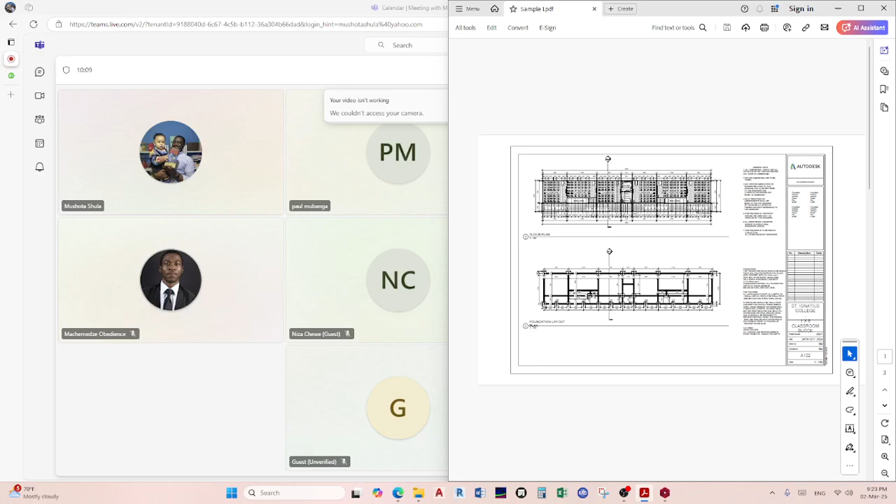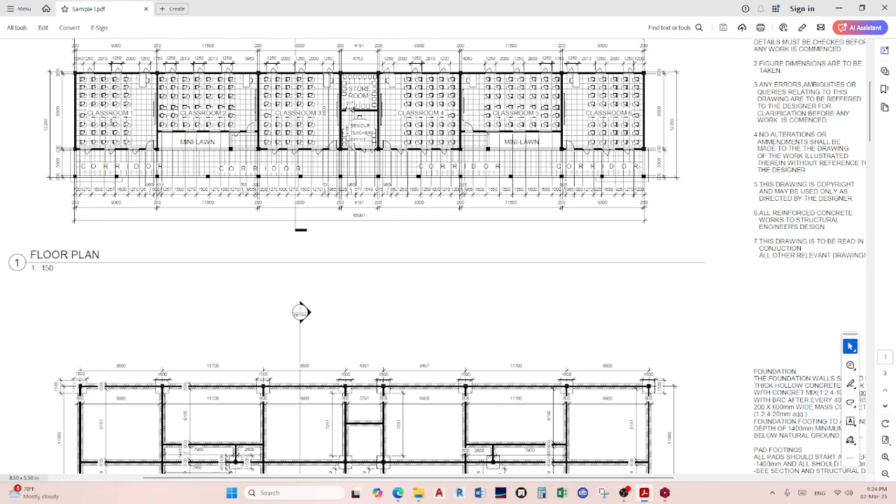So on one part, I have the PDF from yesterday. For everyone else that wasn't able to view the video from yesterday, what we are going to be doing is we will analyze this structure. This is a problematic structure. Initially, the architect had designed it so that it can be a one-story structure. But now the client would like to revise it so that there's another floor right on top of the ground floor, so that they can have more classrooms. It's a classroom block with six classrooms.

And then this is the architect's proposed foundation layout. So now the situation is that the client has already started construction, right? And they've already done these foundation bases of 1.5 by 1.5 and columns of 400 by 400. So now their concern is, can they add another floor on top with what they've already constructed, these 1.5 bases and 400 columns. And also another thing is that now they do not want to use concrete.

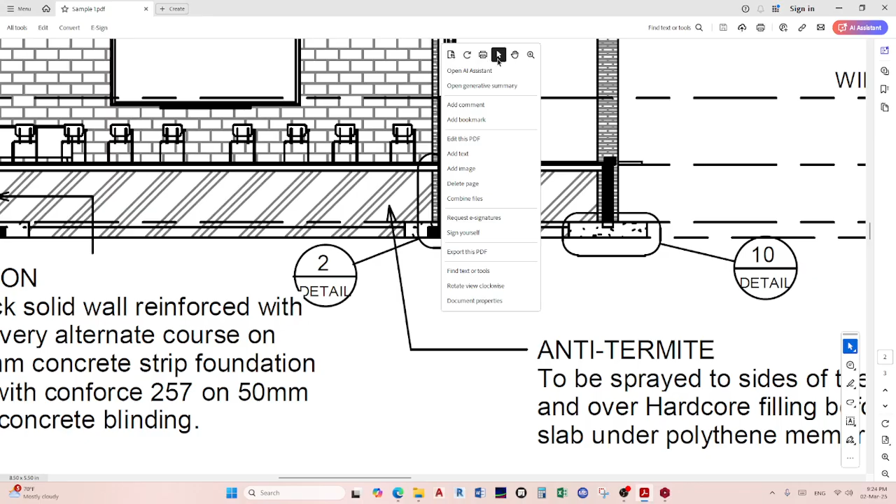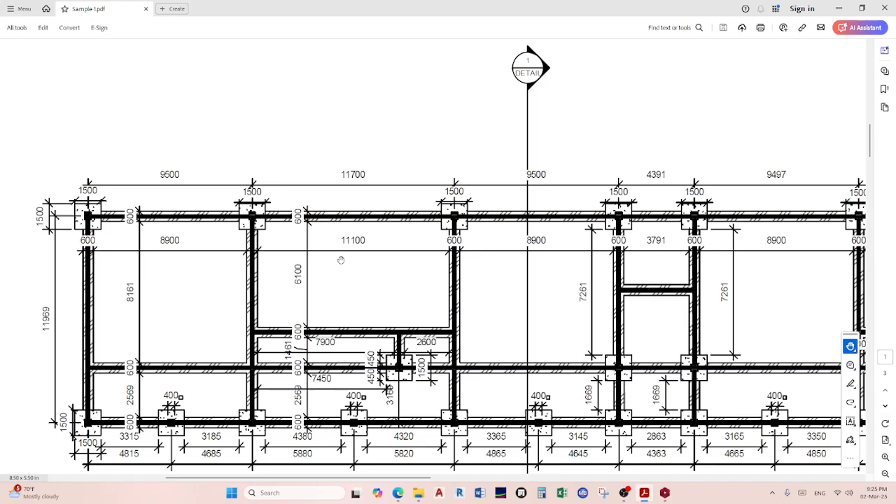When you zoom in on the section here, you can see that initially the proposed material is concrete. So now they would like to switch to steel, because after some advice, imagine having a beam that's running for 11.7 meters. So we want to switch to steel, because steel is fabricated and sold in 12-meter lengths.

So from yesterday, what we did is we did some grid lines and we placed some columns. Some people call them neck columns, other people call them stub columns, because they're called neck because they're buried in the earth, so that's the neck. I do not know what stub means, but I know they're called stubs. If anyone knows why they are called stub columns, you may be able to explain to us why.

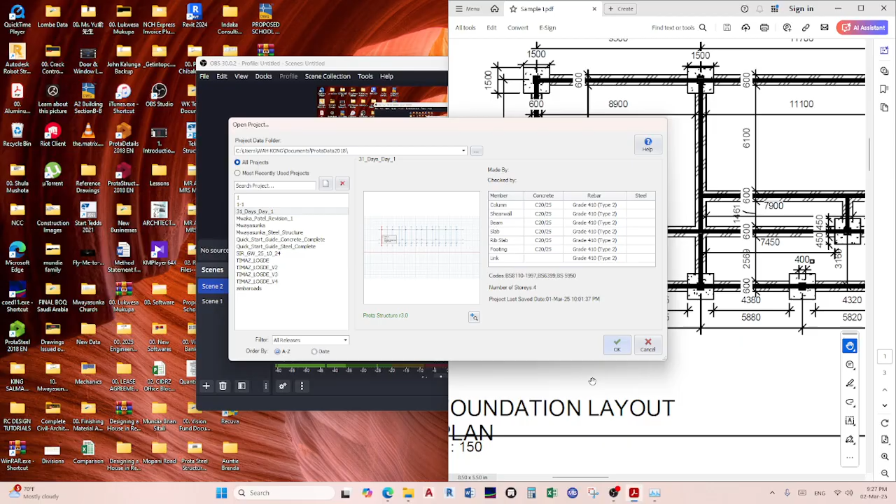So this is what we have done yesterday. And yesterday we had a good audience. We had Lisa, we had Obedience, we had Mukusa, although I cannot see Mukusa here today.

But then, Niza, if you remember the recap that we had yesterday, can you just walk us through if possible? And also, I hope you can see my screen. I can't really hear that. Everyone is complaining about the buzz sound.

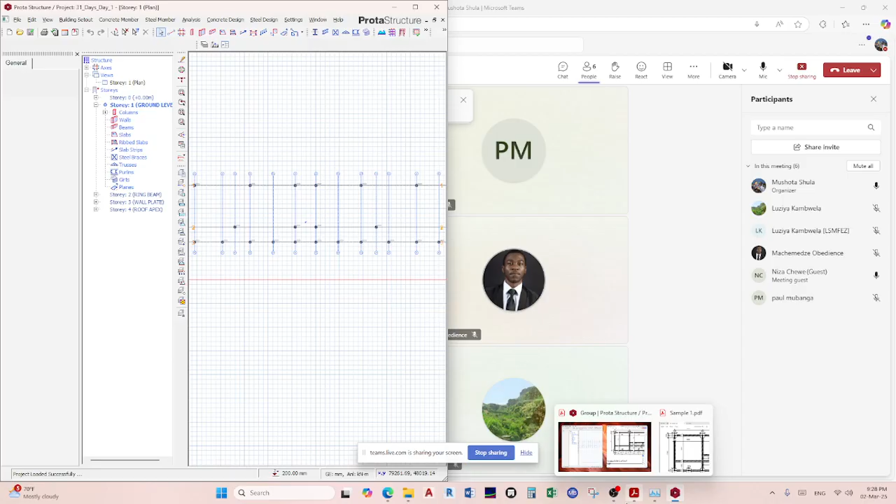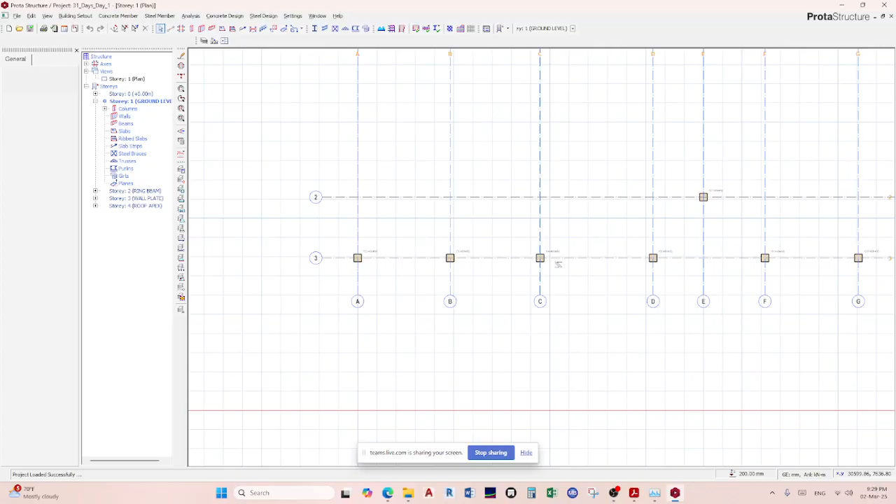So from yesterday, we had added grid lines in the Y direction and the X direction. This is according to the Cartesian coordinates. We've got A up until G here, and 1 to 3. This makes it very easy for us to identify these columns. We would say this column is A1, this one is A3, this one is B3, this one is C1, and this one is C3, and so on and so forth. So we also discussed the building layout, this one edit story.

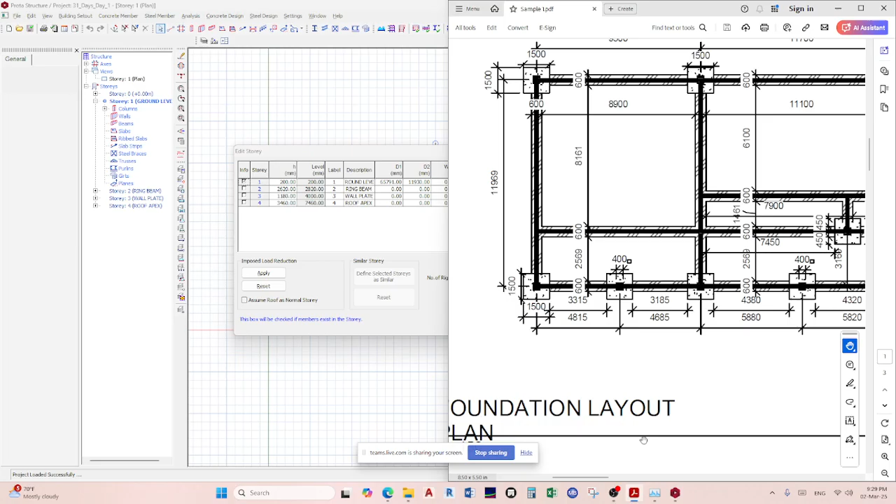We had shown that we can add the levels according to the architect's section, from the top of the pad, the floor plan, the ring beam, and the roof. One thing about this edit storey feature is it shows you which floors or levels are populated, according to the tick box here, the info.

So when you are designing in Prota Structure, what usually happens is that if you add a level or a floor, you need to add information in it, you need to populate it. That's when you can run the analysis. If you create a level and do not populate it, there will be no analysis. Let me show you.

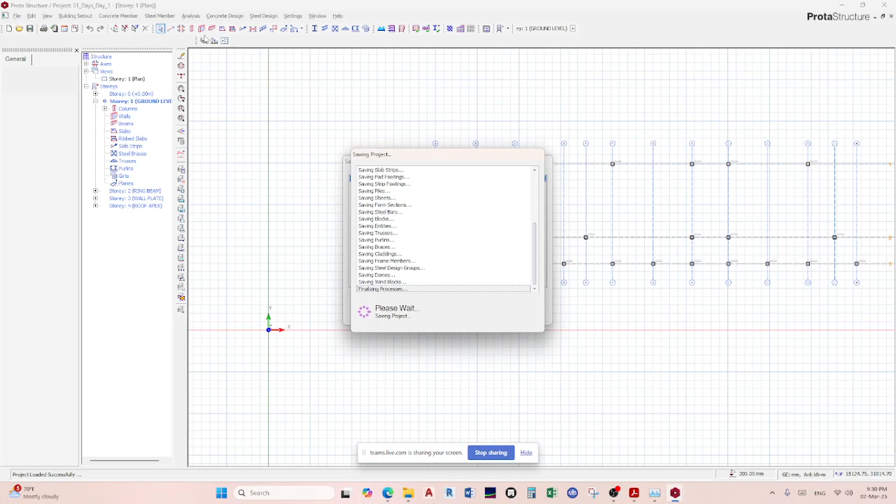If I go to this analysis tab right now, and go to building analysis, suppose I decided to run this analysis, it will give me an error message saying certain information in other floors has not been included or populated. So the edit storey button feature is extremely useful.

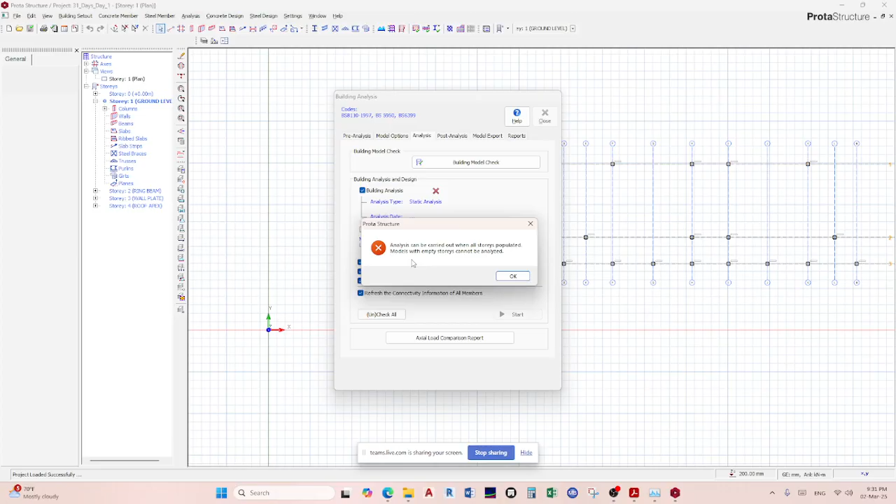If I perform a building check here and start, no errors. But suppose I decided to run an analysis here, you see this error message, it says analysis can be carried out when all storeys are populated. Models with empty storeys cannot be analyzed.

So in the Building Setout, when you go to edit storey, this tick box shows that the ground floor has information, and this information is when you go to the 3D. In this section of the software you can change to plan views or 3D views. You go to storey, right click, and you've got these options, either plan or 3D. If you'd like to view it in 3D, it gives you this 3D view.

Are you guys following?

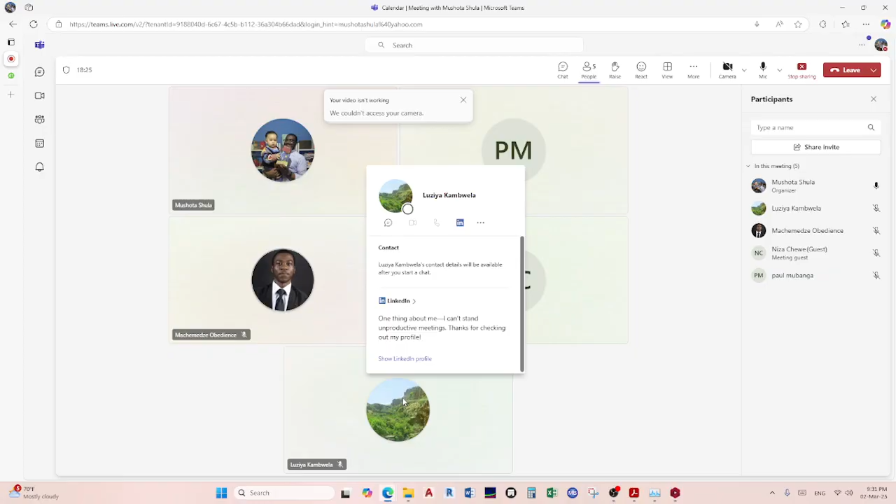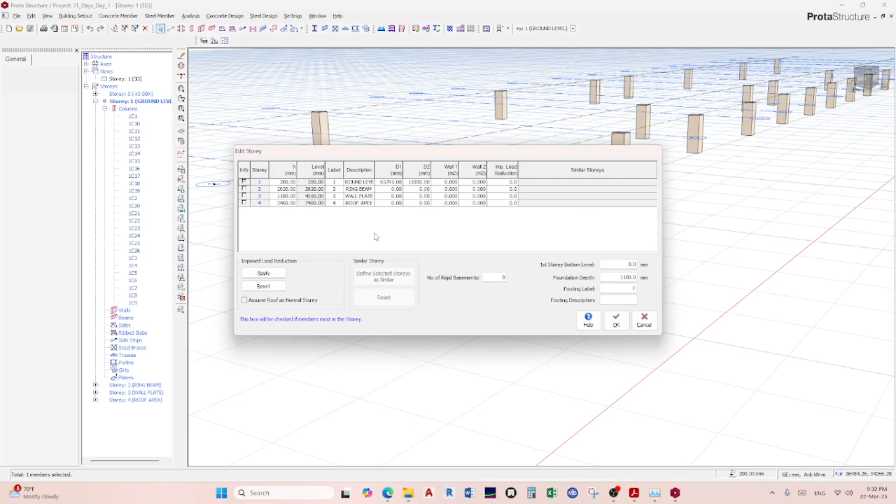Okay, so here I've got these neck columns or stub columns, and we discussed that when you go into the building set out and click on edit storey, it shows you the foundation depth. And then we carried out that experiment just to see what it means.

For example, if I wanted my foundation depth to be 5 meters, I click enter and okay. See how they go deep into the ground by 5 meters, because the ground floor remains here, but when I go to the first floor, that's the top, the difference is 200 millimeters.

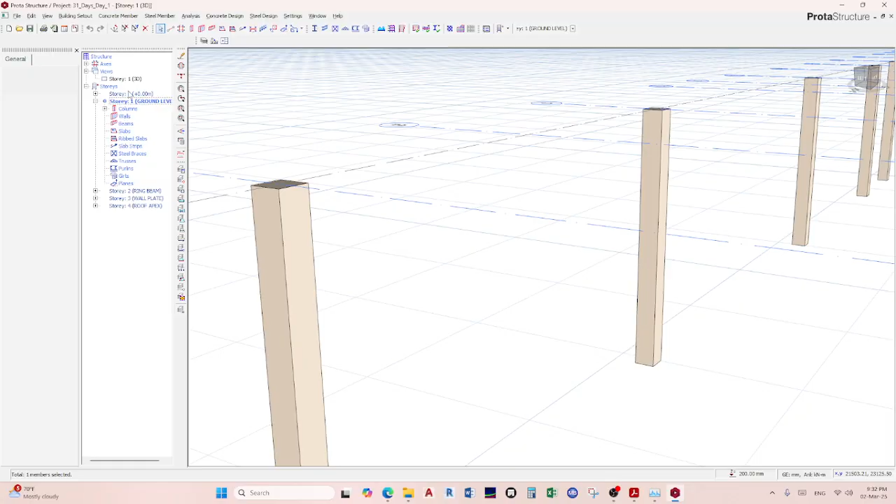Okay, let me put it back because we're only carrying out a design analysis here. I would like for my foundations to balance an economical standpoint and also a structural standpoint. You do not want to use a lot of concrete. The deeper you go, the more material you use.

Also, if you do not go so deep, then you're building the structure on the surface, and you do not want to do that. You want to make sure that the foundational substructure elements are in the ground, so that the load transmission and the load transfer can be good.

So here it was at 1100, but I would like for it to be maybe 1300, so that when we add the thickness of 300, it goes to 1600. I'll okay it here.

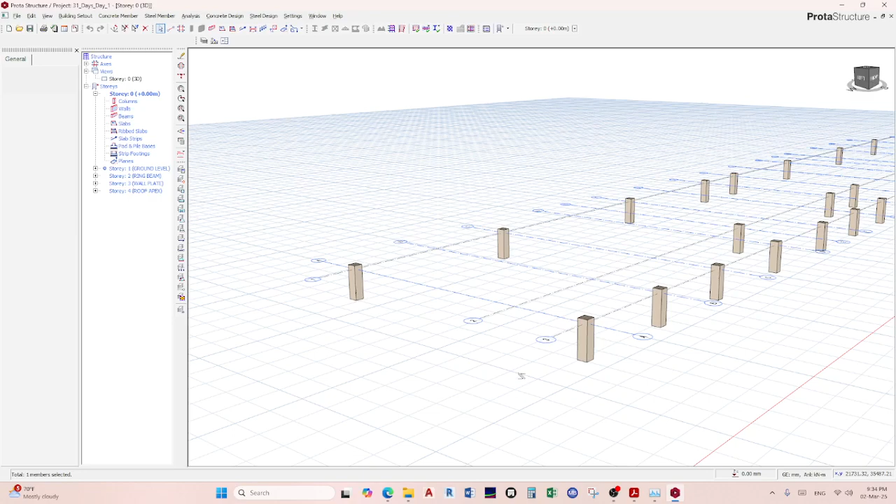See, it's reduced here. Now I can begin my column placement. I want my columns to start from the ring beam, from the wall plate. What is the level of the wall plate? Here's the wall plate, it's at 4 meters.

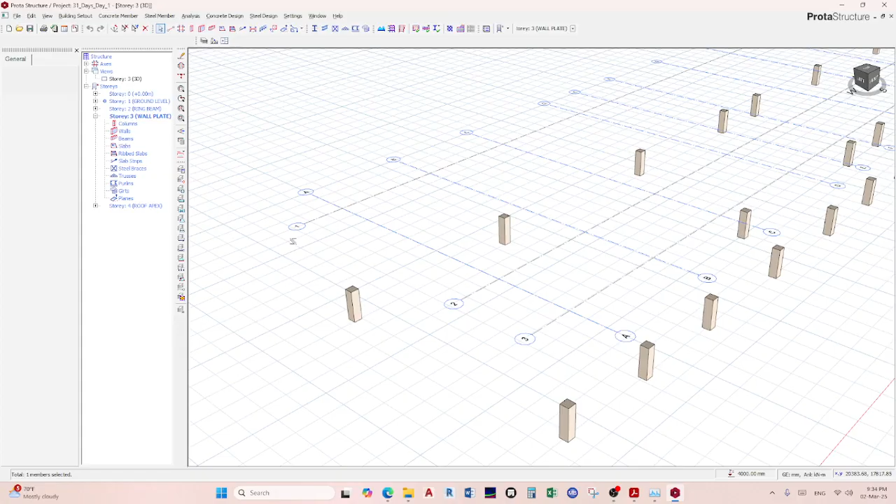So if I would like my column to start from here up until there, I'll go to this column button, or concrete column. Actually I'm using a steel column, so either the steel tab here or this one. When you go to this one, these are the properties.

When you click on the section, it says section. Once you hover your mouse over it, it says section manage. If you click on it, you can decide whether you want it to be concrete or steel. Like I explained, our particular client wants the superstructure in steel. Then you can decide if you want to use the British, the Euro, or the American sections. In Zambia we often use the British or the Euro.

This UC means universal column, the UB will be universal beam. If you read a lot of structural drawings, you see it's either UC, UB, or the IPEs. The IPs are usually in the Euro. You see, this is the IPs here.

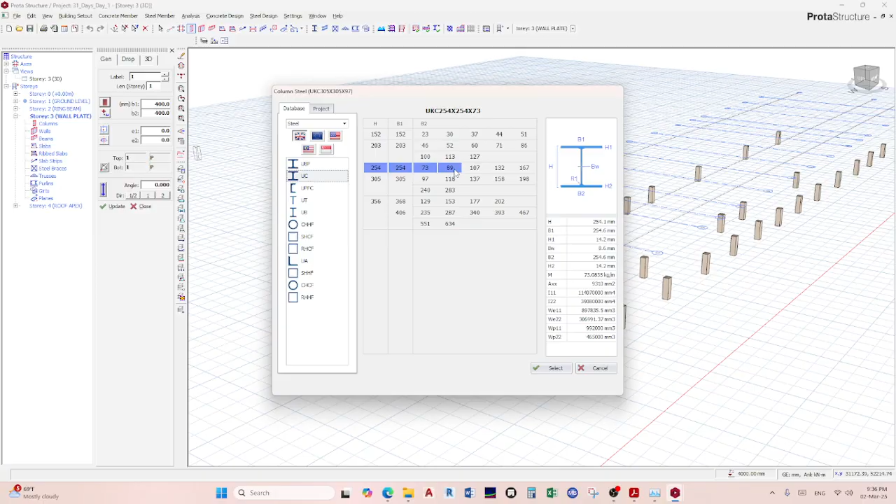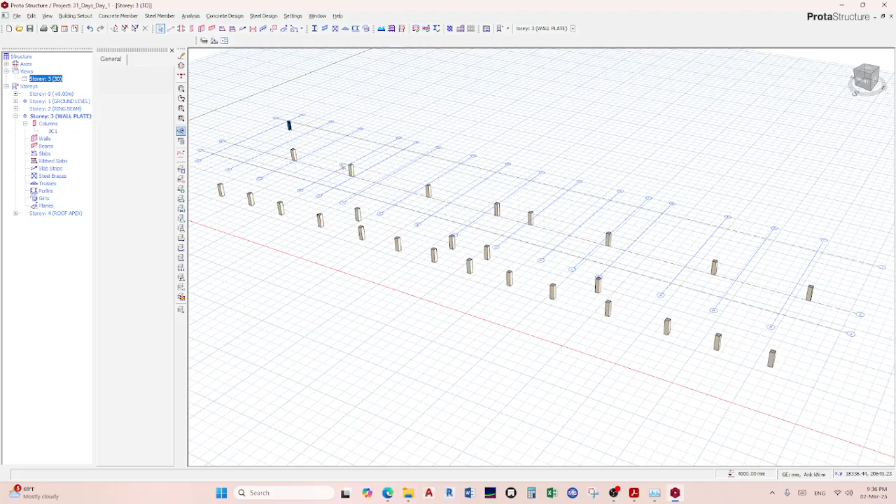So I'd like to use a universal column, section 254 by 254, and the kg is probably 167. I select, I okay. I would like to place these in plan view. When I click on the insertion, press cancel, and go to 3D, I'll be able to see the column over here.

This column is starting from the left, but I'd like to extend it to the ground floor. I'll select it, right click, go to properties. Here in 3D, there's the delta Z for the top and the delta Z for the bottom. What it means is that there's an increment. If I add 100 increment for the top, it goes to the top.

Watch - if that wasn't visible, let me say 5,000. 5,000, update. See how it goes to the top.

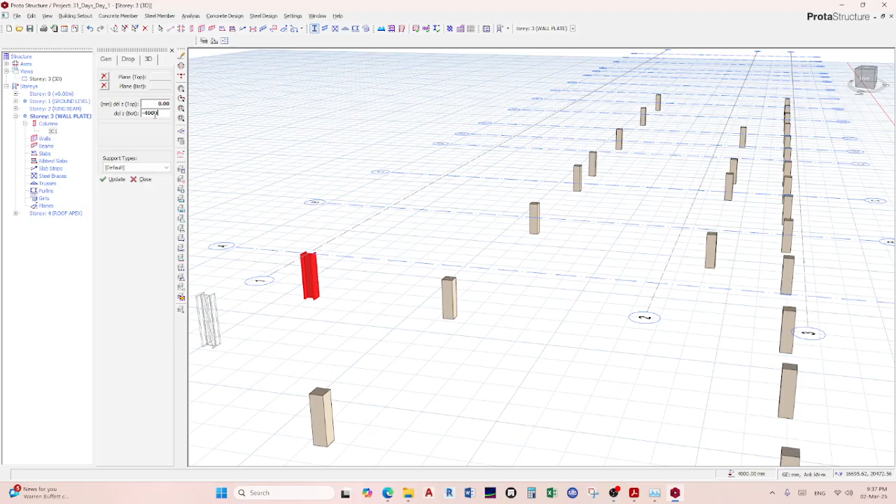But ideally I want it to maintain the wall plate level, and I want it to go down here. So what I'll do is set this to 0, update, and then this will be minus 4,000, because I want it to go minus 4,000, and I'll update. See how it sits on the column there.

Can you guys hear me? I can hear you, but I've lost the screen. Not clear now what you're saying. Okay, can you see the screen now? Can you guys see the screen now? Okay, moving on - not yet.

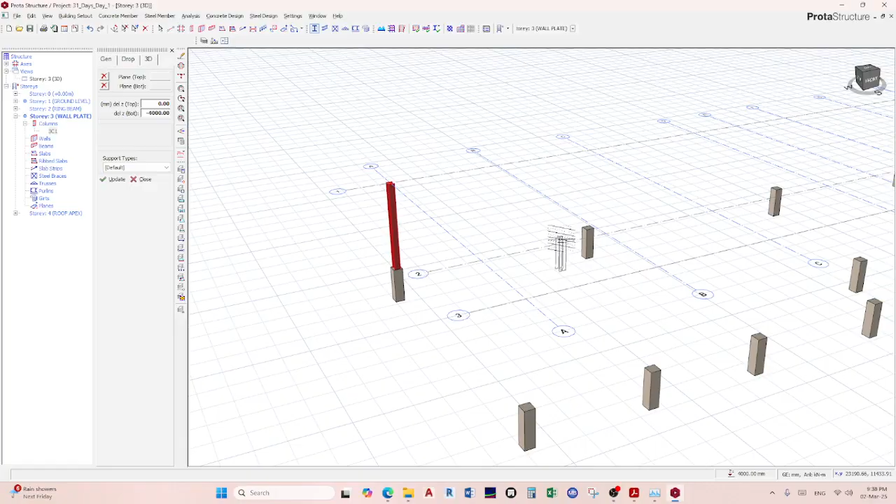So here, what I've done is I've placed the steel column on top of the concrete column, and then here at the bottom we're going to have a base.

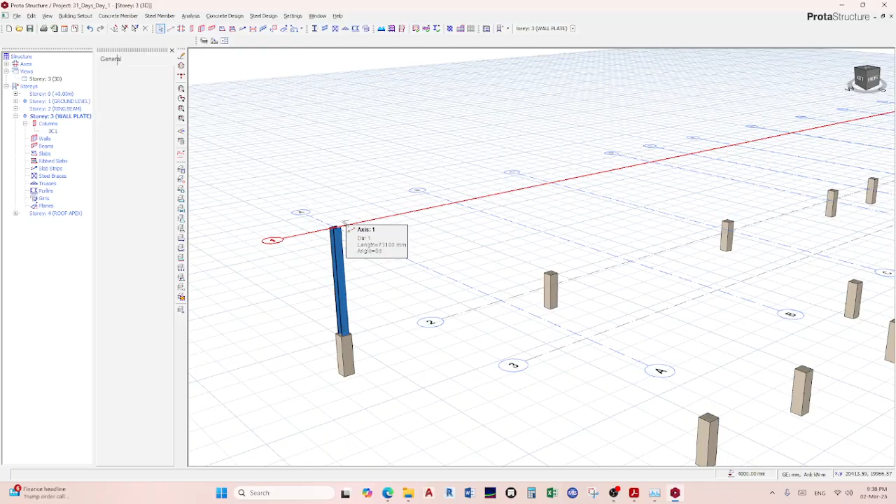There's this cool thing you can do where you can have a 3D view in one window and a plan view in another. In order to do that you need to create two views. So here on Views, you right click - since you already have a 3D view, say you need a plan view.

Now you've got two views; previously you had one. For example...

If I close this, previously I had one - you see it says storey 3. But then if I click on Views, right click, I can add a plan view. Now I have two, so you can place them side by side.

What you can do is go to the Window tab, click on it, and choose whether you want them in a vertical manner like this - and then from there you can switch this to 3D, or you can have them in a horizontal layout.

If you'd like to have one at the top and the other at the bottom, this is actually cool, and it helps so that you can know exactly where you're placing it.

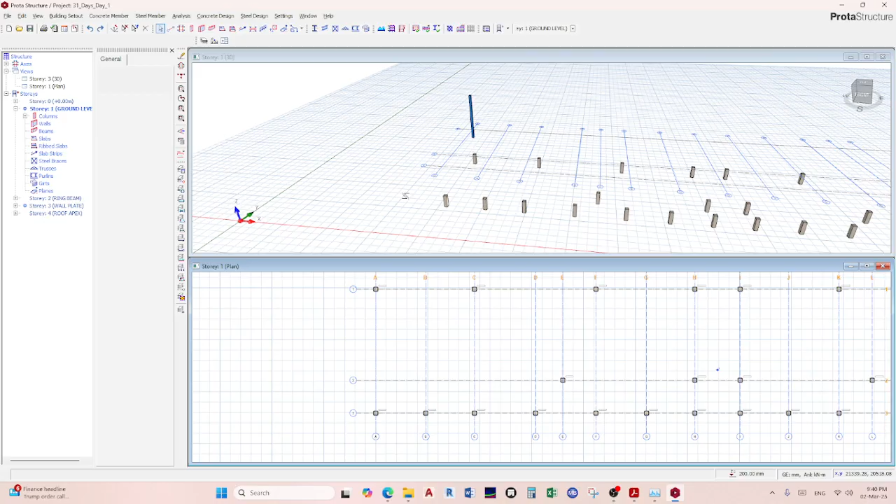For example, when you click it, you activate it. When I click this and go to my ground level where the columns are, I know exactly where to place my steel columns.

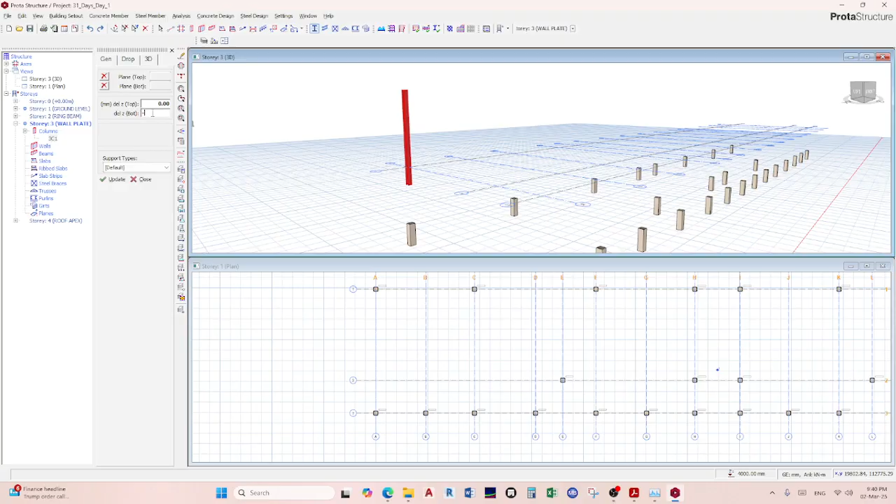Let me just adjust this because I did control Z - properties 3D maintains that 5,000 after pressing control Z, and I would like it to go 4,000 down, and I'll update.

So I want all the columns to sit like that. If I go here, I'll place another one also.

When you hover your mouse over it, you see 4,000 goes all the way to the bottom, but I want it to sit flush with the concrete column.

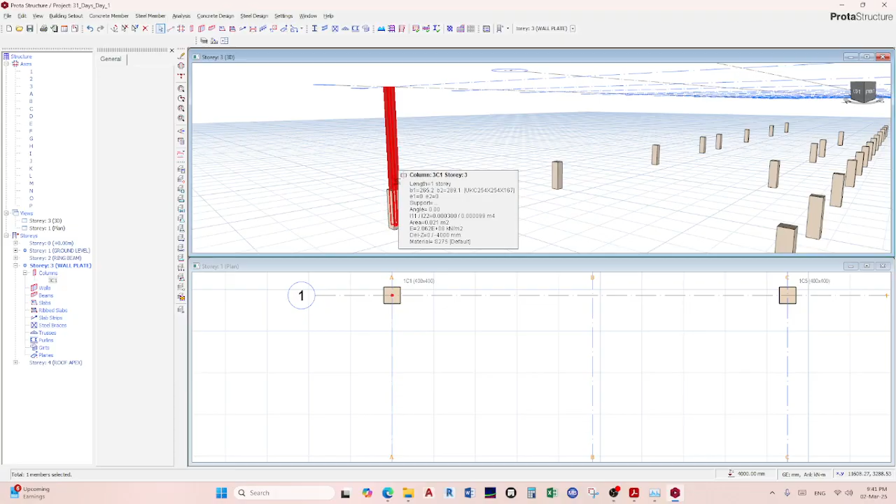So what I'll do is go to the building setup, and I need to find the difference between the wall plates here and down here. You see?

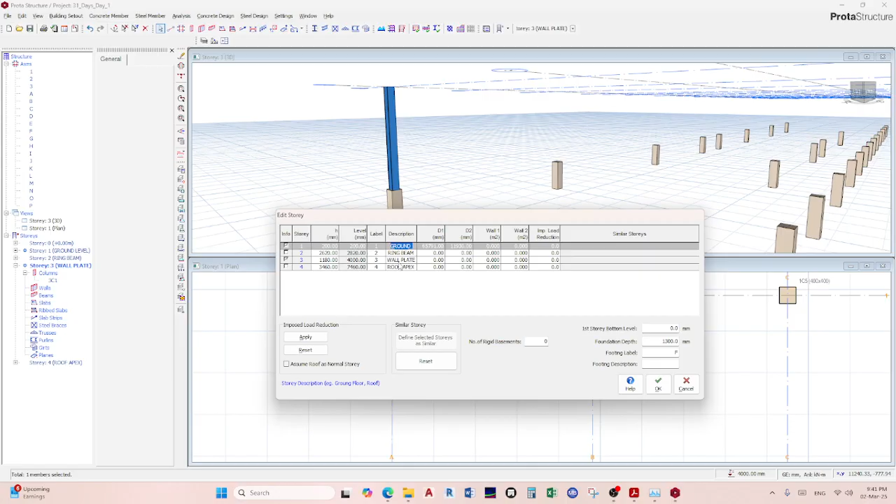So what I'll do is go to your calculator, go to your building setup, and find the difference. So let's say 2,000 minus...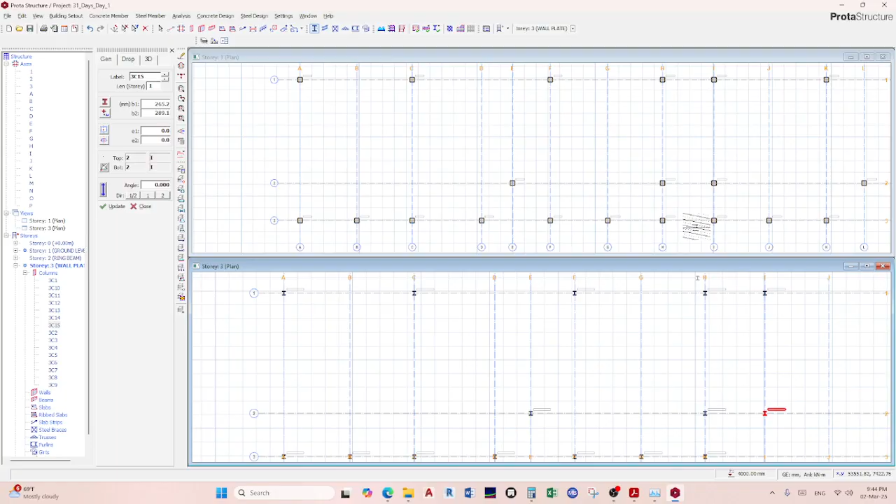I1, H2, I2, and I3. Also J3, K3, L2, K1 here - placing columns at each of these grid intersections.

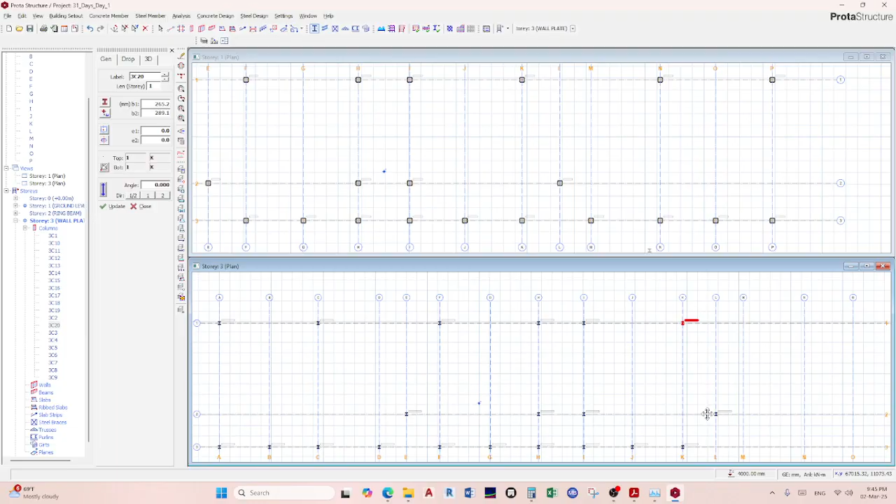Still have a lot of columns to place. Here in properties, N1 here, N3, N1, O3, then P3 and P1.

So here you click on that, you can change it to 3D, and you can see that we have steel columns on top of the concrete columns.

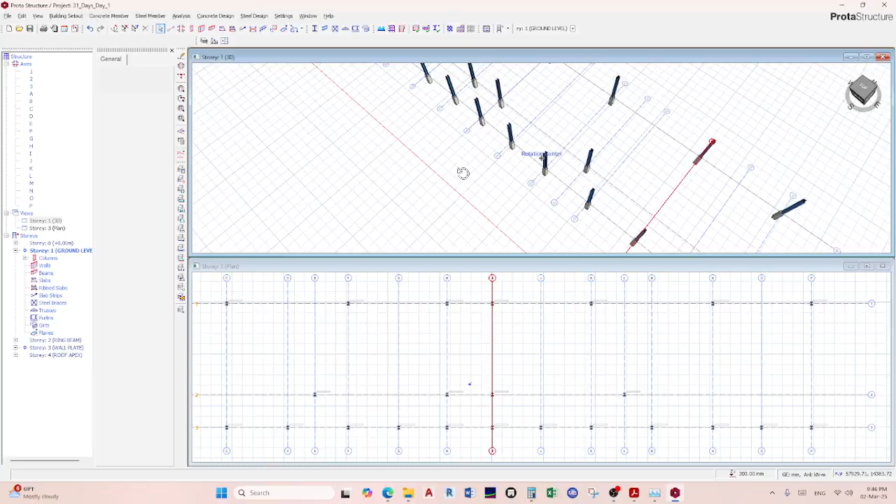So this is just one part. Control S to save your project, and then to end the video I'll show you how to place trusses.

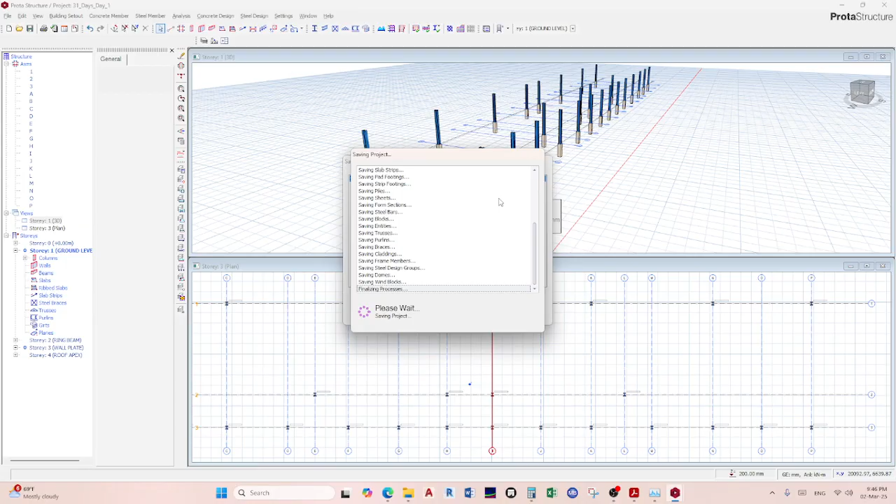And then in the next video we can come and add another floor. So here on roof apex at the wall plate level, we can place also here as one wall plate level.

When you go to the steel member here and press on steel truss - if it doesn't come up, close it and press on steel truss again.

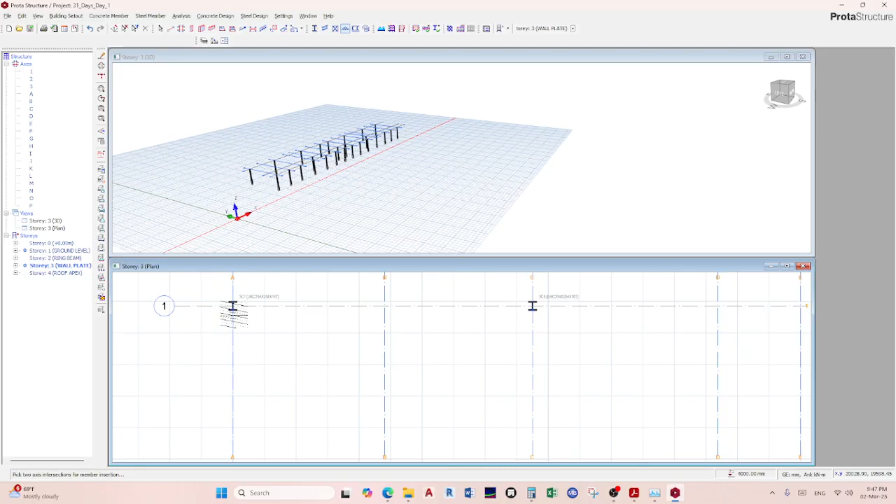Click on this button. When you read here, it says pick two axis intersections for member insertion. You press here and press here also, and then it gives you which truss you want to use.

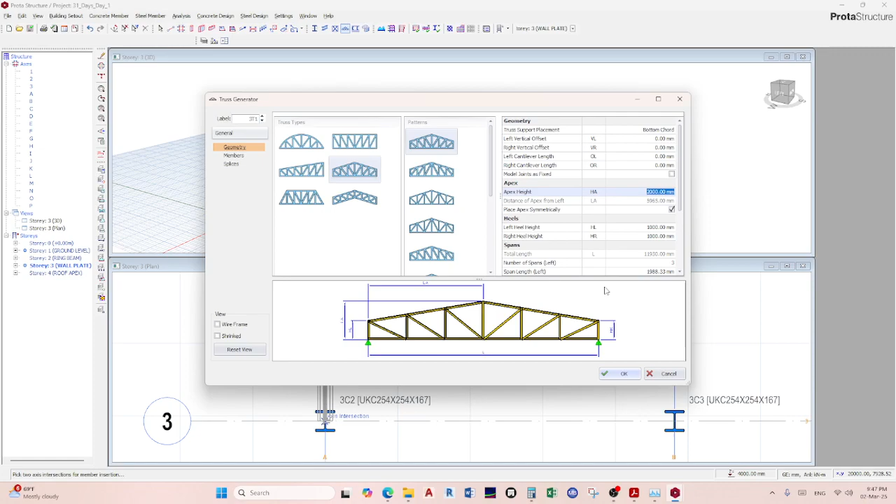You've got a cut truss, you've got the arch truss - quite often you will find this - and then it gives you the geometry information on the right side. So you see here it says apex height; you can either increase it, for example say 5,000, and watch the diagram here - it goes all the way up, you see.

But that's not what you want, it's too much. Maintain 2,000, and then on the heels here it says HR and HL. You can either zero it to meet, and then you can say okay, and then you see.

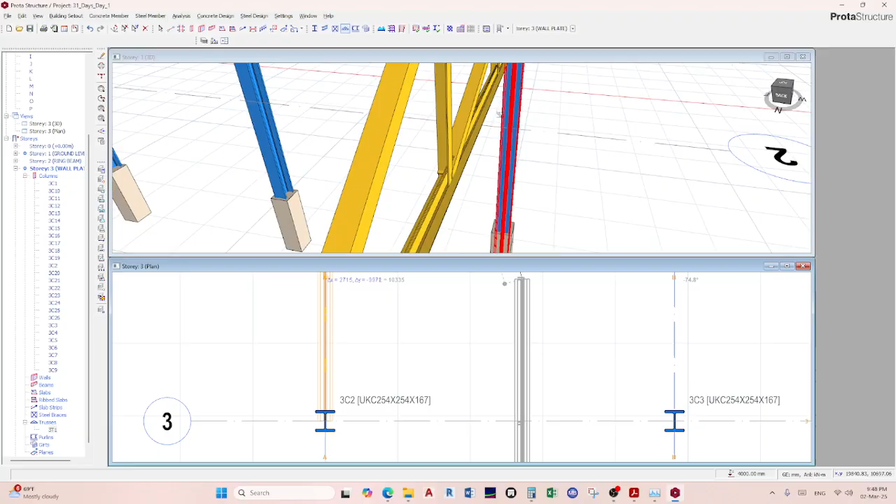But when you zoom in closely here, you can see that this truss is made up of L shapes, or angles as they're called on the market. You can change the geometry to have this as the top chord, this as the bottom chord, and this as the vertical. So you can choose what kind of sections you'd like to use.

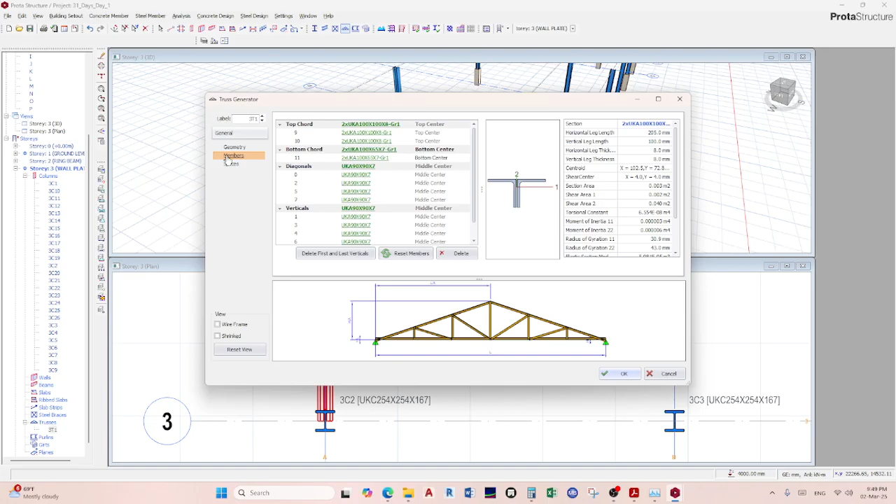For example, if I would like mine to be IPEs, I'll go to members, select the top chord, and when you click on it, I'd like to use maybe an IPE 200. I'll OK it, and when you check, it's changed to an IPE.

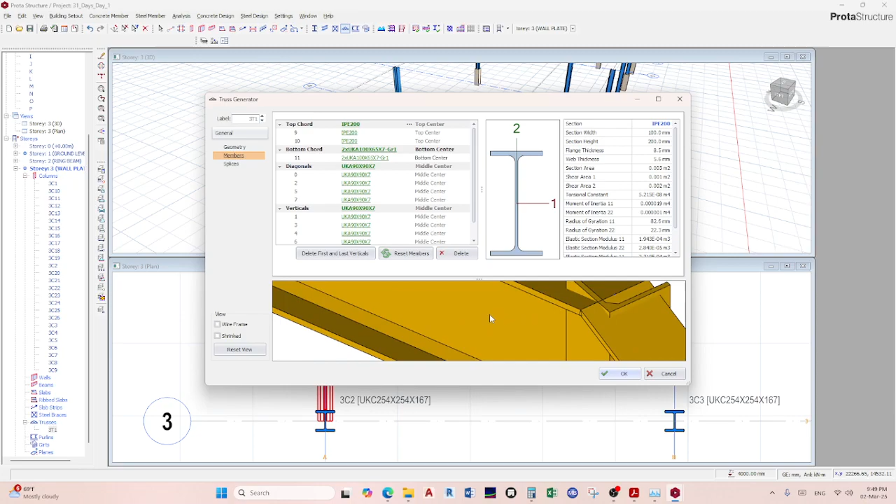Before it was an angle. And then the bottom chord also here, when you click on the bottom chord option there, you can switch to the Euro code and say you would like an IPE 200. You select like that.

Oh, the network. Anyway, you'll find this recording uploaded. Okay. Someone is requesting to join. Alright.

I hope you guys are following, and I hope I'm not moving too fast. So you can see that I've changed the members. The top chord now is an IPE, it's an I section, right? And the bottom chord also is an I section.

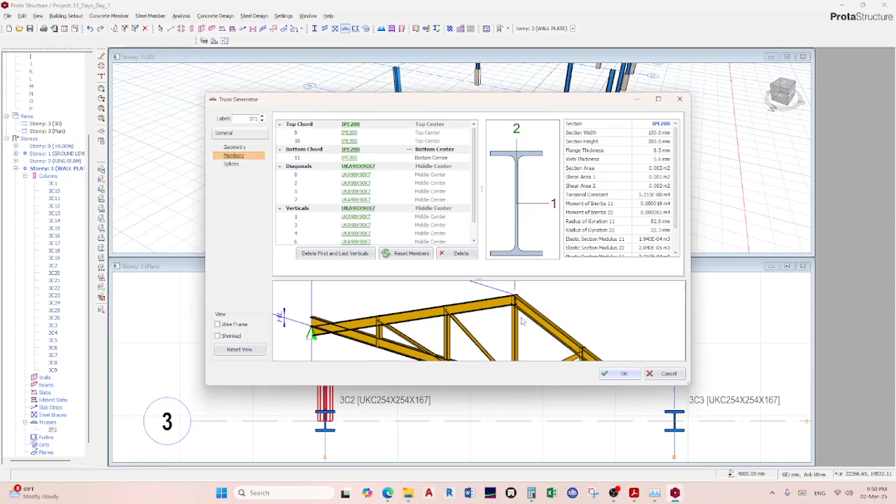Just to be safe, I would like the vertical also to be, well, we can include a haunch here so that this and this will be one, and then for the vertical and the webs we can have the angles, the L shapes. So when I OK it, you can see that it changes.

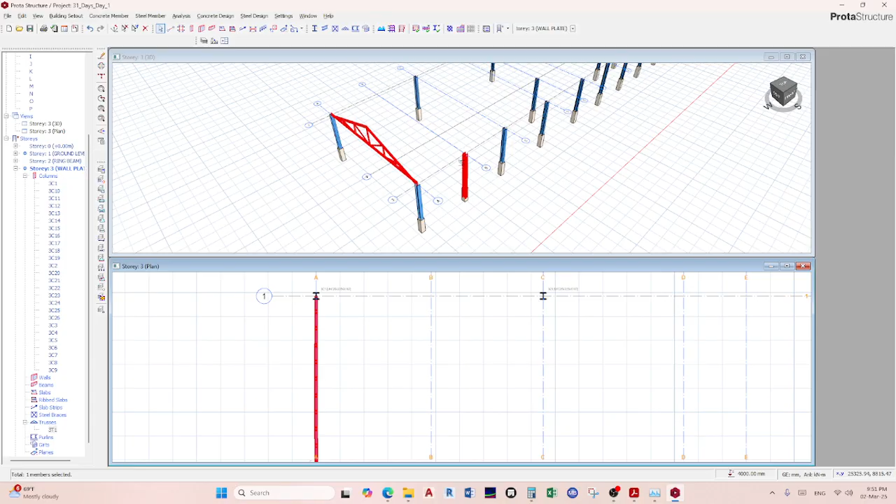So to simplify your work, you can copy to the intersections, like from here. Mind you, be careful, you do not want to put a truss on this column because it doesn't have a support on this side, so it's going to be hanging, unless you intend to put a support. Then you can put a column here, a truss here. So what that means is that you can copy. You see, when you right click, you have the copy option.

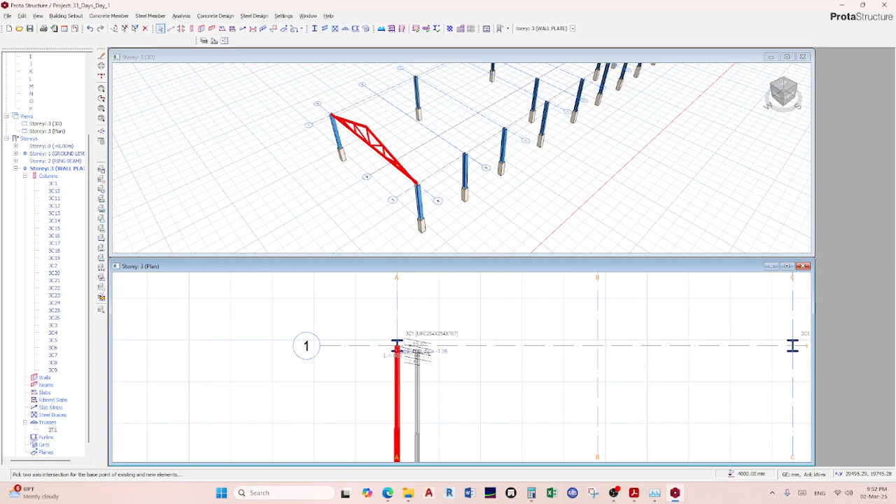So here you can right click, copy, and you can select the base point here, and then you can... actually, this is where we said you shouldn't place it, so I'll come and delete it later. You can check the 3D there so that you can have an idea.

So when I press it, if I click there, this is convenient because you could support both ends. This is not convenient, it doesn't have a support on that end. This is also not convenient. However, this one is extremely convenient.

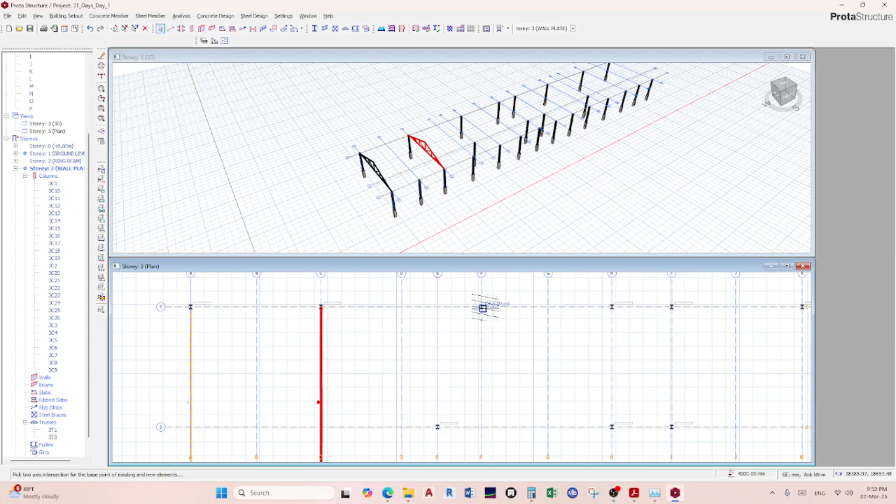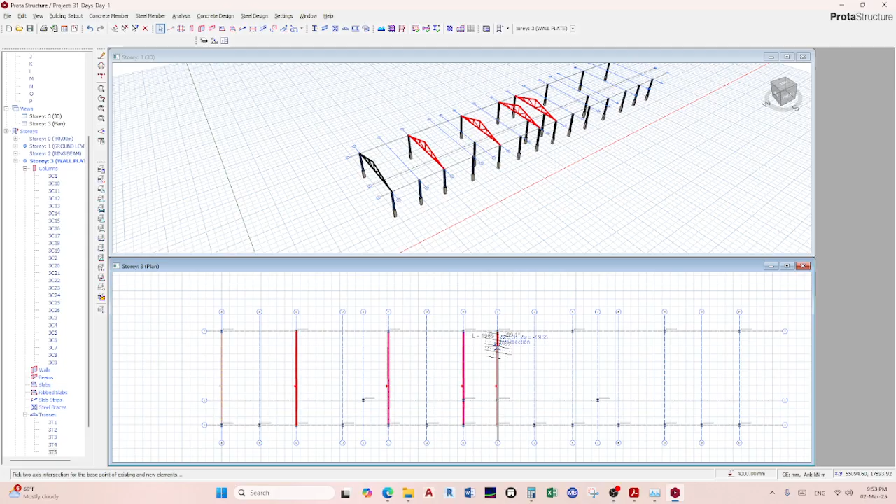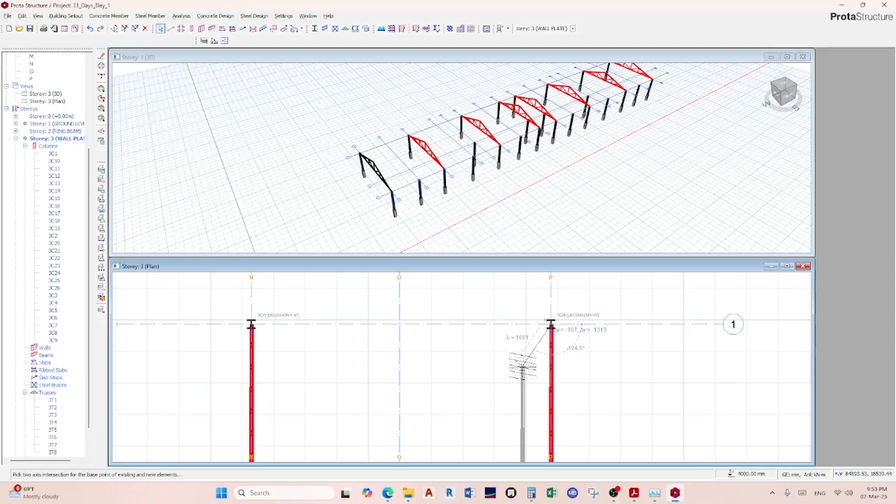So this one is set to delete, this one you keep. You can copy, paste it here, take it from there, paste it there, and there. Now we have a truss.

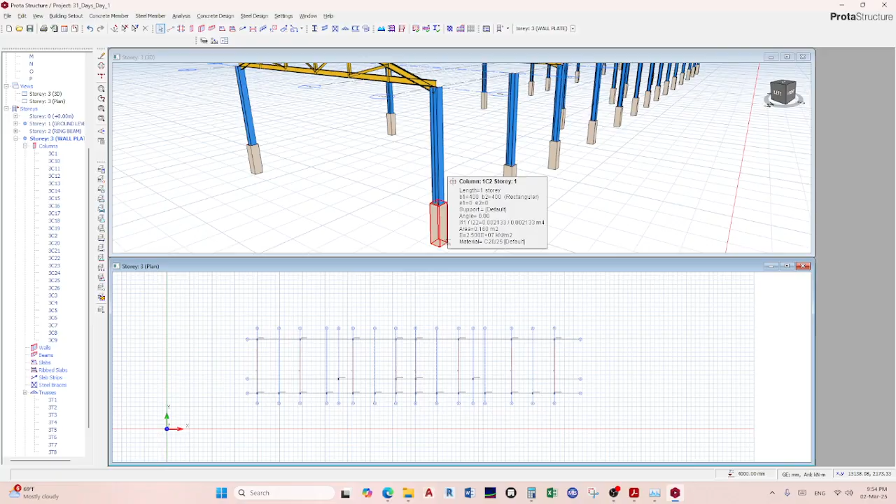I think for now I'll end it on the website. What we did is that we included these two columns to work on steel columns, right? And then also changed the height to make sure that they have a base plate.

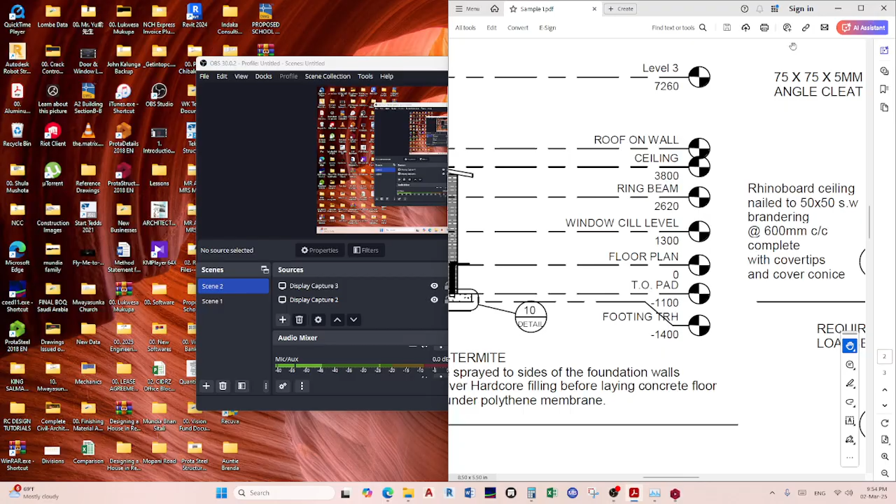So ultimately, once this is done, what I would like to happen is that I would like for it to look like this pattern. Let's just give it some time to load. Okay.

And also I showed you how to place this side by side. On the window you either select horizontal or vertical, like that, depending on how you're feeling and how you'd like to orient your work.

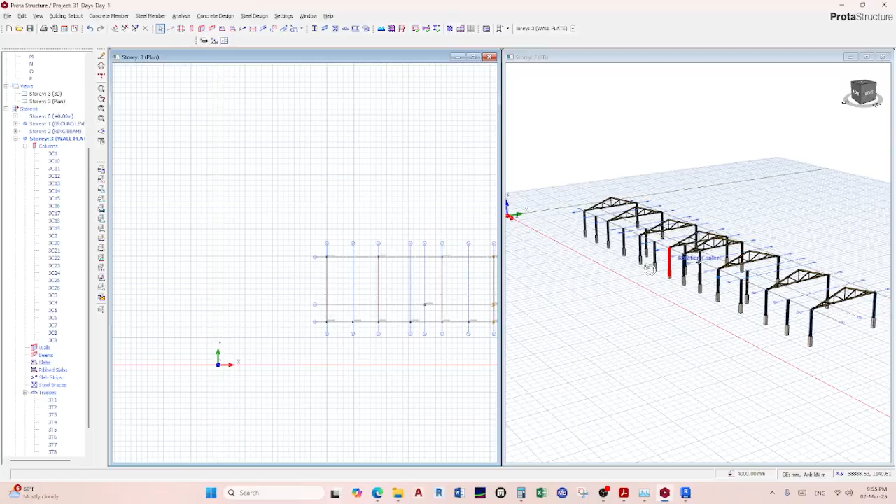Later on when you take this into testing, you need to really be specific about the supports that you create. So let me show you what that looks like.

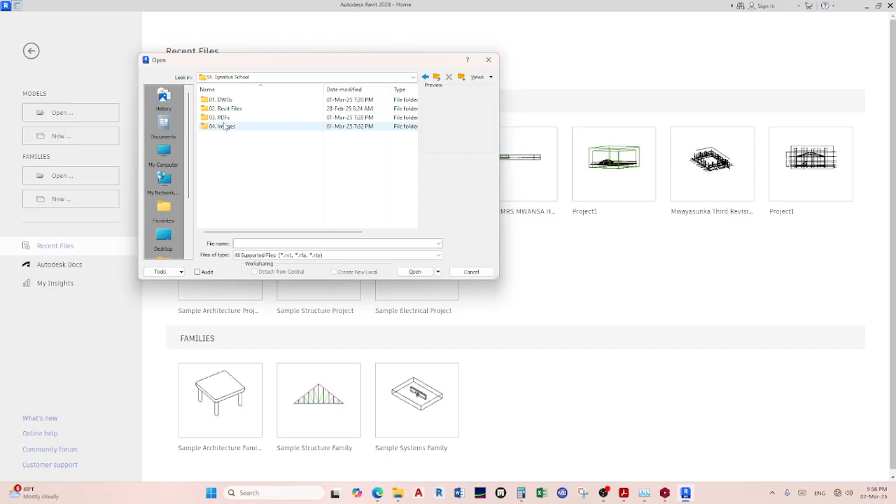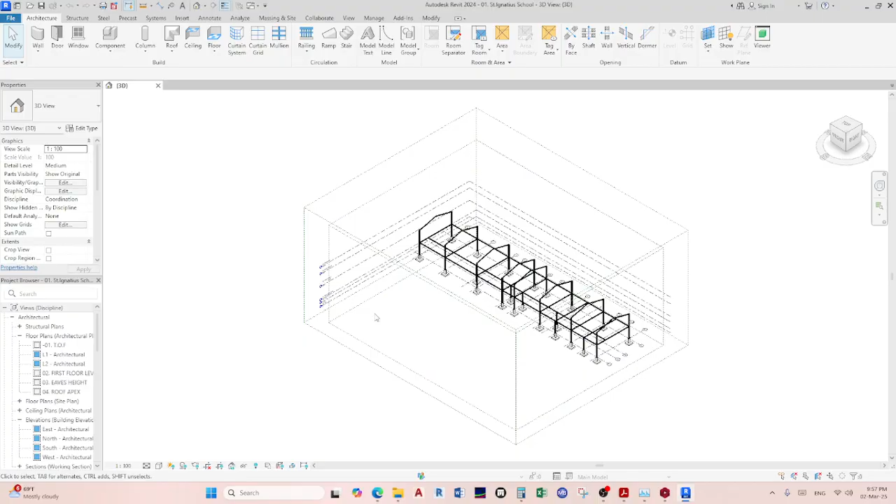When I open it, I also model the steel structure. So it looks something like this. So I'm coming from this perspective, like this.

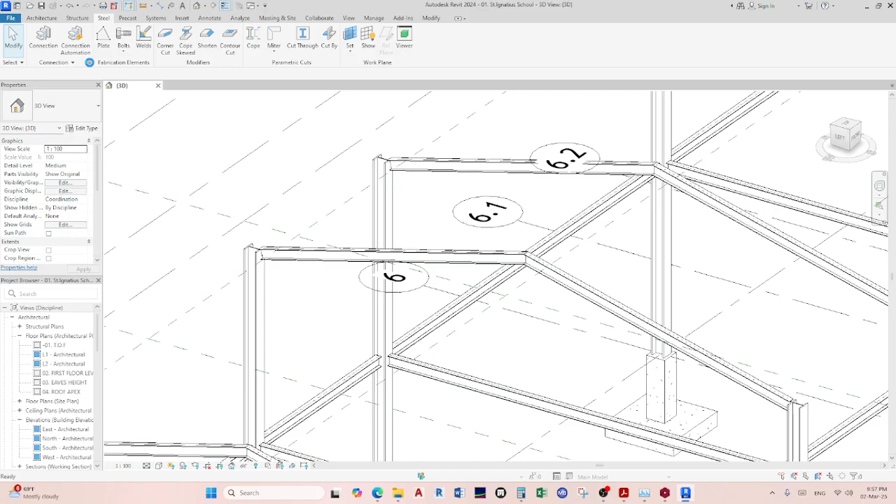So what it should look like is that when you go to steel, when you click on your connection, you press the drop down for whatever apex connection you want, so you can load it. You click on the focal point, and then it will load that apex so you add it to your format. It should look something like this.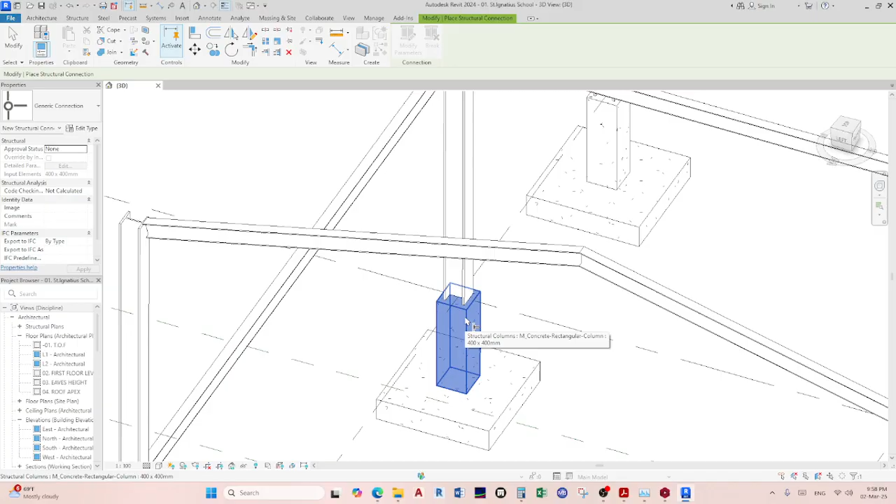You go to your file, then place what you want. And then as far as the base plates go, what you're looking for is putting a selection for concrete, and for steel you enter whatever selection you want for the base plate right here on this blue part.

On the blue part there you search for your base plates. Should be base plate there, concrete. Okay, so you find your connection, click right there, and then you change the base plate there.